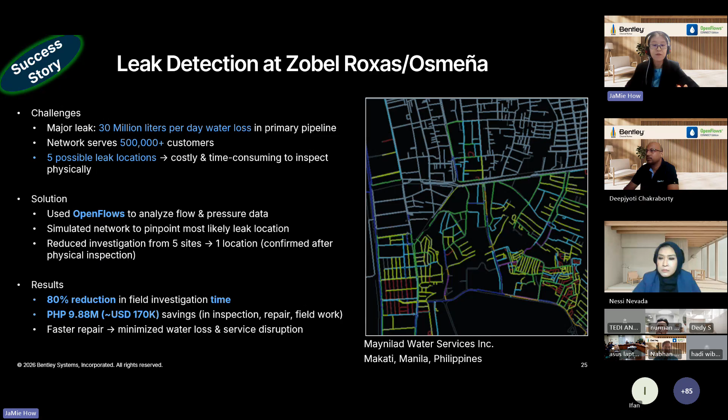So NRW reduction starts with knowing exactly where to act, and with the right modeling and field data, utilities or water bodies can target issues faster and more effectively. To achieve that, you will need the ability to analyze and understand the network in detail. This is where solutions like OpenFlows come in, and Bentley's OpenFlows solutions support modeling and analysis across water distribution and wastewater.

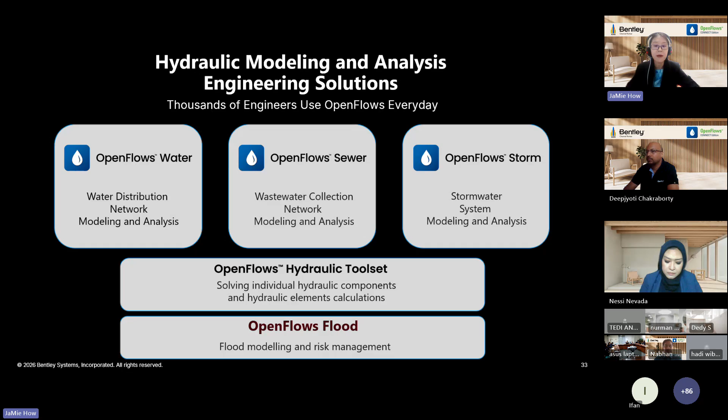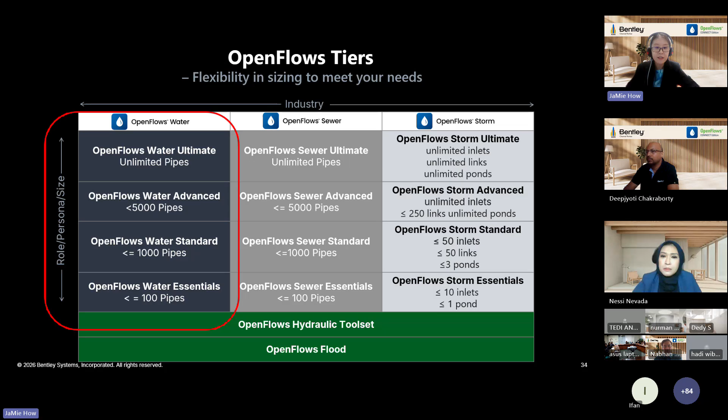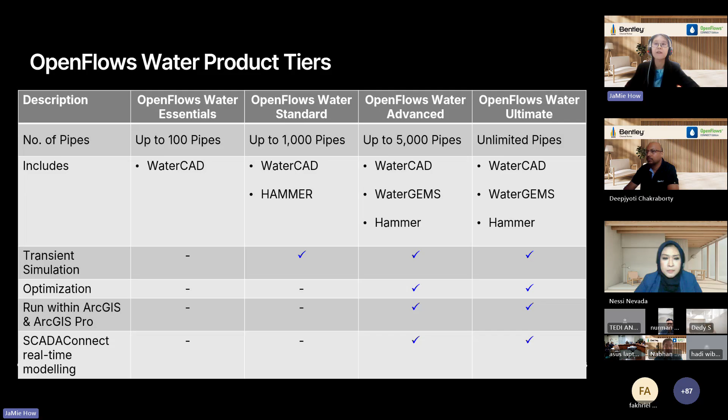Today's focus will be on OpenFlows Water. We will take a look at the breakdown or simplified comparison of OpenFlows Water. As mentioned, the differentiator is in terms of size, number of pipes, which is the size of your project - from very small projects of 100 pipes, 1,000 pipes, 5,000 pipes, to unlimited pipes for very large networks. You can use the larger ones, and the different tiers also cover different types of capabilities, from lowest to highest.

Lastly, we would like to share a little bit on the Virtuoso Practitioner License, which is available on Bentley's e-commerce platform, where you can purchase a license at an affordable price bundled with free trainings. So how does it work? It is a flexible solution because it can be purchased by any entity, whether you're an individual or from a small or large organization - you can purchase the Virtuoso subscription.

It is also flexible because it only lasts for 12 months. So if your project is for 2 to 3 years, you can use it for that period, and after that, if you do not need to use it anymore, you do not need to continue the renewal of your subscription.

And lastly, the free trainings that come bundled with the license you purchase - we call them keys, where you can use these to redeem free customizable training. For example, when you purchase a Virtuoso subscription of OpenFlows, it comes bundled with keys, and these keys will help unlock different types of training that you can redeem.

It can be on-demand, which is recorded trainings where you can watch at your own time and pace for a period of 90 days, or it can be customizable or specific to your project or team requirements. This can be done through tailor-made training programs or mentoring services for your specific project as well. All of this is done online through Teams.

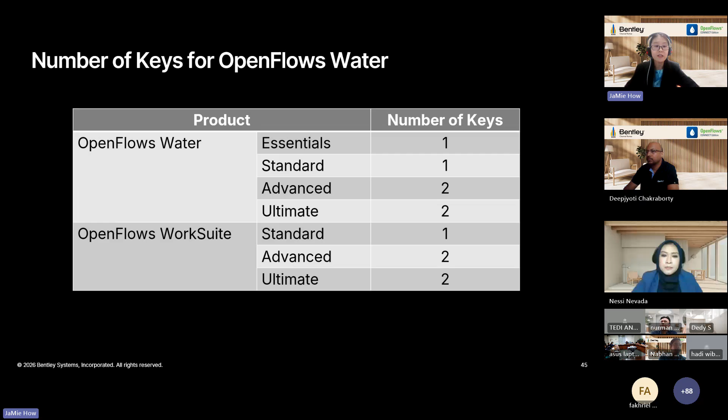The number of keys also varies depending on the product tier you purchase. For OpenFlows Water, the lowest two product tiers - Essentials and Standard - come with 1 key per license, and Advanced and Ultimate come with 2 keys per license. The WorkSuite is a combination of water and sewer, only if you have the requirement of both in your projects; otherwise, just the water solution will be sufficient. One key is almost 2 hours of free training that you can redeem.

In summary, the Virtuoso subscription is a practitioner license and named user license with yearly investment and without any additional maintenance fee. With this, you will have full control over your yearly software costs, and throughout your active subscription period you are eligible for free technical support assistance, free software updates for any new releases, and expert services redeemable using the keys bundled with your license.

If you need any further information, do contact Bu Nessi or PT Kurnia Handasa Nevada. They are one of our channel partners here in Indonesia, and we are happy to work together with them to assist you further on any inquiries you have.

So with that, we hope that this quick overview of how NRW challenges can be addressed through better visibility and data-driven approaches can help you. I'll now hand over the session back to Bu Nessi for her to introduce our next presenter.

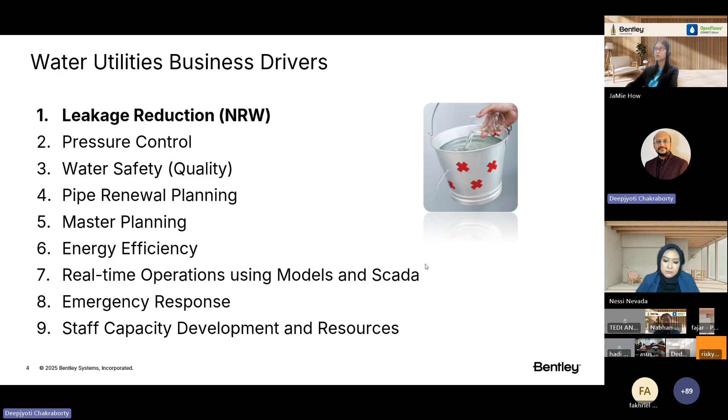The thing is how you are actually working with all of these tools. Sometimes we don't need all the tools, but we should know how it actually works. From master planning to everything, it helps with complete network optimization.

Now let's see a few points about the software. One is interoperability. Some of you who have joined are maybe experts in CAD, because in civil engineering we also learned CAD during our BTechs, and maybe in GIS too. We have complete interoperability with ArcGIS Pro, AutoCAD, and Civil 3D - on their platform, you can also use our applications. That is the interoperability.

So anyone who is an expert in water and also CAD or GIS can work on these solutions - no need to open this as a standalone application, you can avail all the features within MicroStation, ArcGIS Pro, AutoCAD, and so on. You may ask: if you have some GIS or CAD files, could they be opened in this application? My answer is yes - you can integrate all this CAD and GIS information here very quickly.

When you're doing any modeling, we usually don't go layout by layout manually. You can work according to Bing maps in the background, any CAD maps, shape files, or even images in the background. If you have a large network, you can integrate the road center line and create the model very quickly. You can simulate, predict, and solve network system problems, optimize, do 24/7 analysis, and even optimize pump performance.

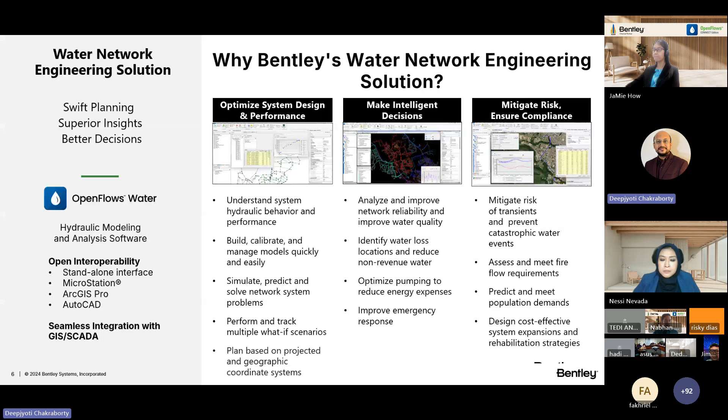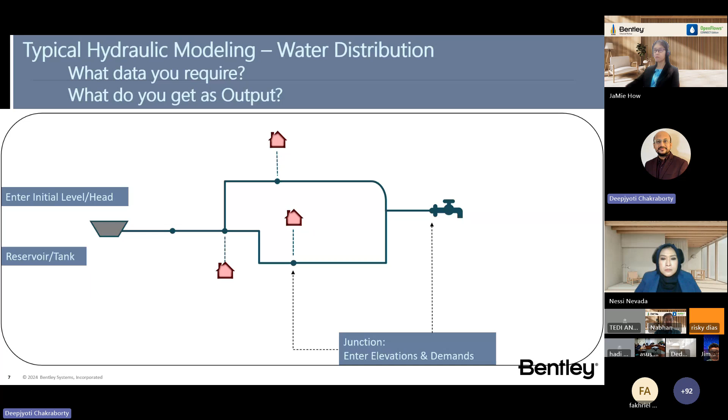Now let's have a look at a simple modeling example - what data you require and what you get as output. So you build the network, provide the reservoirs or tanks, provide the junctions, enter all the elevations of the junctions and the demands, and give the pipe lengths, C factors, and the diameters. Additionally, if you have pump curve input, give those inputs. After computations, you will get the output as pressure, velocity, hydraulic grade line, head losses.

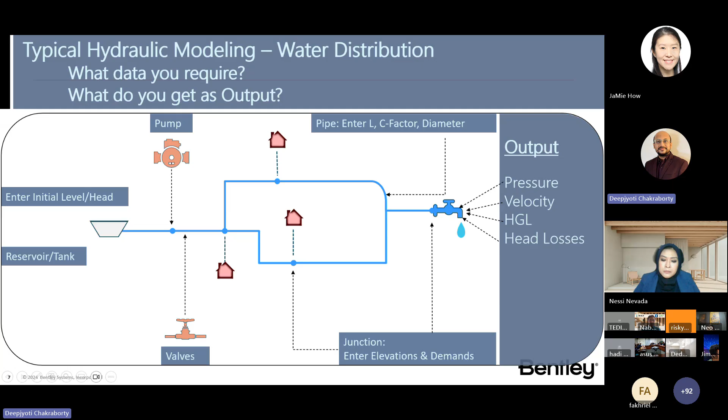And this is not limited to these results - there are a lot of results in graphs, in animations, in profiles also. You can compare those, make them in a tabular format, and there are multiple ways to showcase those results. But for a simple network, I'm just giving you the understanding of how it actually works and what data you require. Now let's see about the process.

So first, when we do the model building, we create the model geometry, we extract the elevations, we assign the demands. We have a lot of applications available in the market which are free applications, but they don't have the ability to integrate CAD shape files into your models very quickly. So those applications are not advanced.

You could not make that interoperable with CAD, GIS. You could not do the optimizations automatically. You could not just provide the diameter sets and have the software choose from the diameters - those things could not happen. You could not make multiple scenarios with multiple alternatives with those freeware applications.

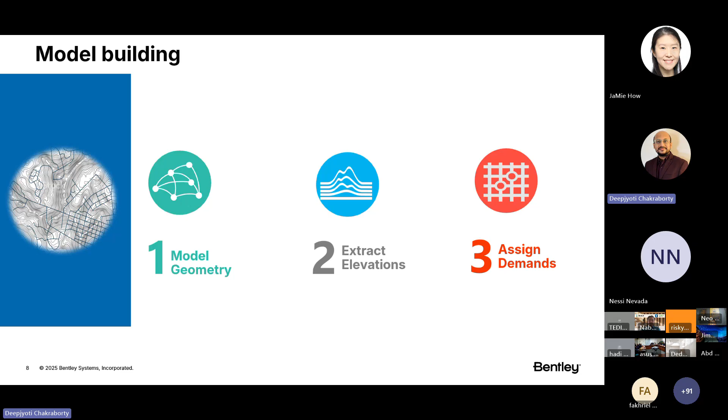And it has different demand assignment programs, I'll show you that. As an example, when you do this model geometry, the model could be built from any of the data sources - it could be CAD, SQL, Oracle, shape files, QGIS files. Even from Excel you can just import the data, and the model will be automatically built.

You need to just map the elements, like which junction is the point, which is a polyline as a pipeline - you just need to mention it. Even if you have much more attributed data, like pipe diameters, elevations, everything, you can just import through the model builder.

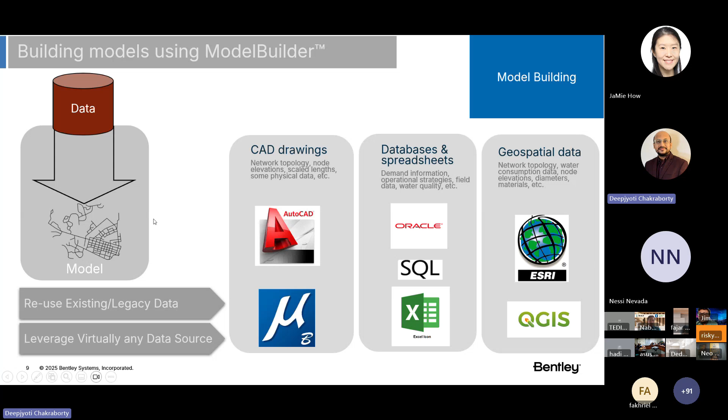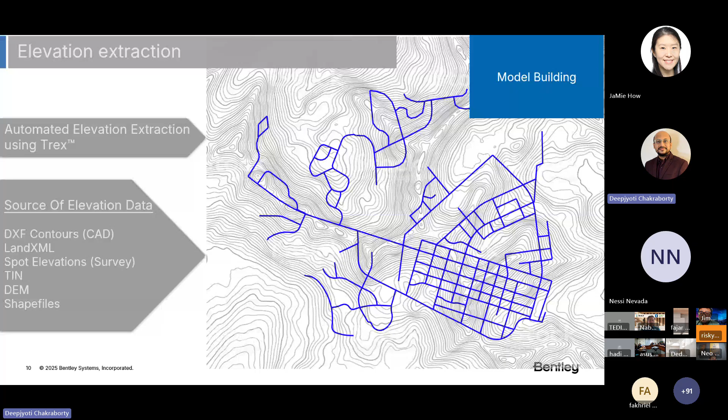So there is another way called TREX, the terrain extractor tool, by which you can make that contour map available in the background, and all the junction elevations will be imported from the data you have provided - it may be shape files, it may be anything. So you can easily integrate the data and make complete model files in a few seconds.

So next is the different methods of demand application. You can do manual methods - going to the junctions and providing the loadings - but that is a huge time-taking task. With the flex tables, though, you can do it rapidly. But this is more like automated methods.

Like you can do proportional distribution by area, equal flow distribution, proportional distribution by population. You just provide the densities and shape files, and the software will distribute the loading as per the requirements, according to the different methods you are taking.

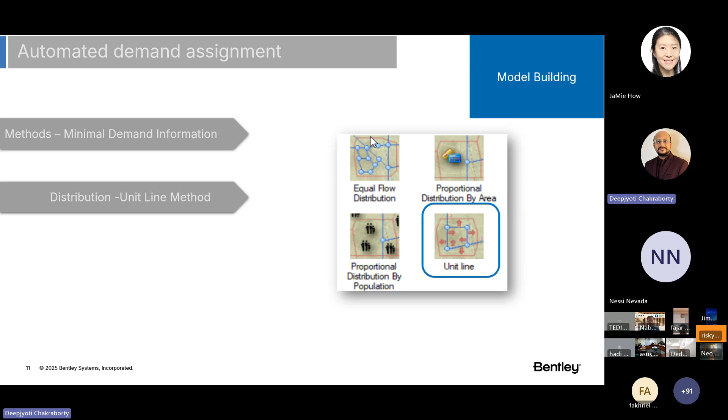There is another method called the unit line method - it will distribute the loads. For example, you want to distribute loadings for one village, so it will distribute according to the lengths of the network. So when you have less information, you can follow these methods.

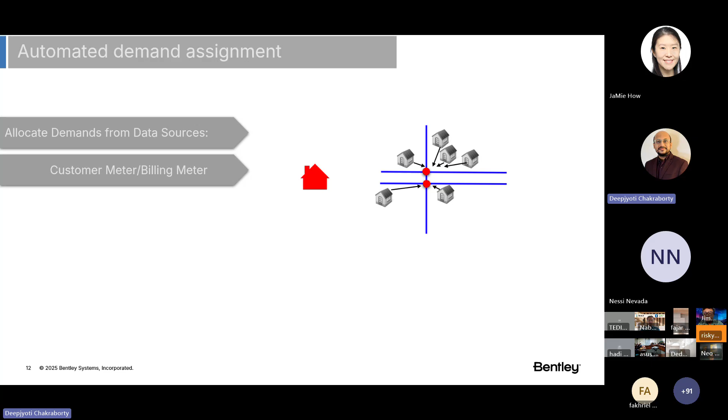You can calculate the Thiessen polygons and distribute according to the Thiessen polygon areas. You can go with the customer meters or the billing meter methods. You can go with flow area polygons, populations, or census polygons. You can also use land use polygons. So when it comes to the reports, there are multiple ways for those reports.

You can go with shape files, CAD files, land XML files. You can also export as EPANET files. Some of you may be users of EPANET - all the files you have in EPANET can be imported here, and you can make much more on it, those which are not available in EPANET.

You can make pump control sets, extended period simulations, pump schedules, and do optimizations - everything can be done here very quickly. You can showcase all this with good graphics - pressures, velocities, everything can be done with custom reports.

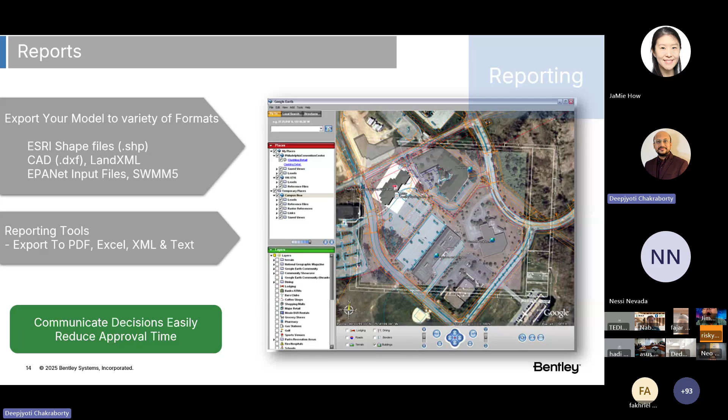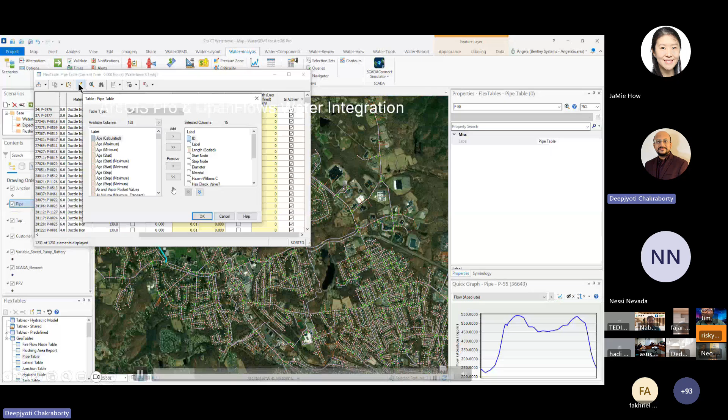In the left you can see those contents. In the background maps, this is flow graphs - you can create quick graphs from the pipe table. You can see the pipe tables, all things in tabular format - these are the tables available in standalone, but you can make this available in GIS or CAD too.

You can see the flows in the attribute table. If I open it, you will see the attributes for GIS and also the flows which came from the computations of these models. You can just initialize the symbologies and color code, and make the annotations too.

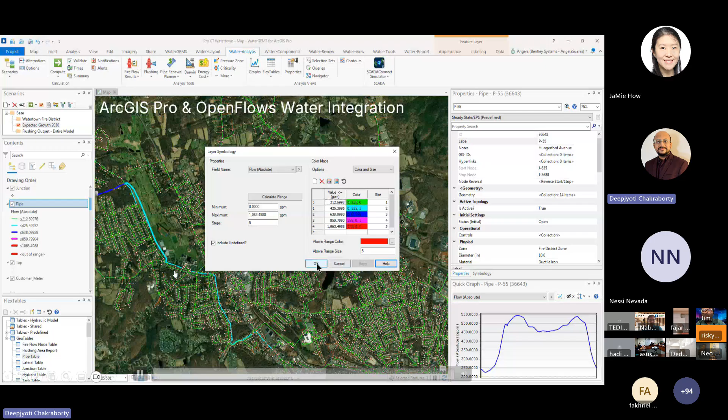So I'm doing a flow range and will color code the network according to the flow. You'll see the colors changing across the network - these are the different colors of the flows. You can do this same thing for junctions too. So this is GIS integration.

Similarly, you can do CAD integrations, and you can do all the features, all the possible ways of using OpenFlows Water tools, on those platforms too.

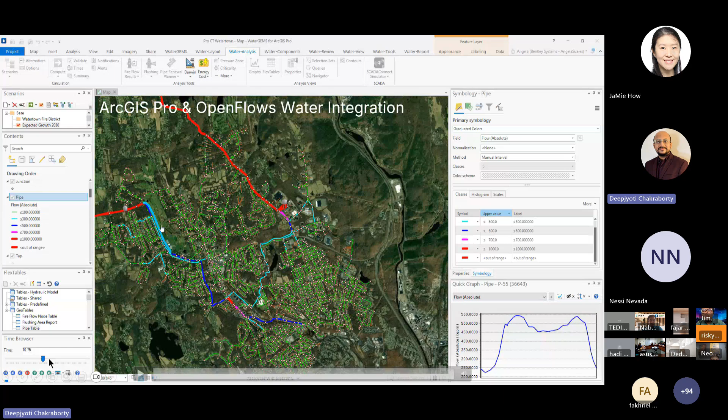Now let me show you the time browser. When you do extended period simulations, you will see the color of the network change, because we are running that EPS. The same thing we can do in standalone, you can do in GIS or CAD platforms too.

Let me show you the water supply network workflow. First we do the topographical survey, population forecast, demand estimations, then zoning, then modeling and analysis and designs, and finally report preparations. From zoning to report preparations, all the steps could be done with OpenFlows applications.

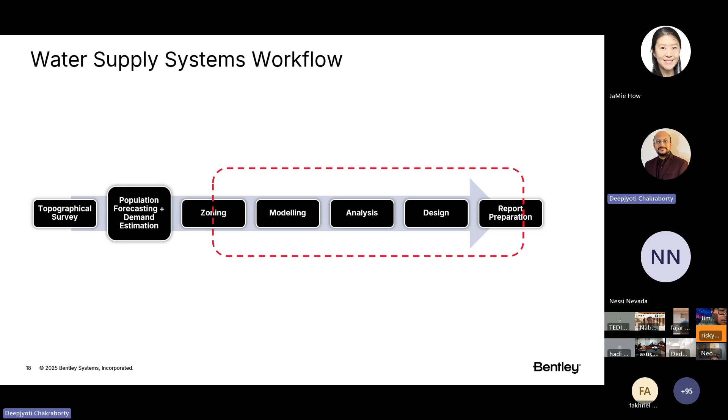Now let me show you one of the key strategies for the 24/7 analysis, so it will be much more clear how we actually do the 24/7 analysis.

We divide the project based on the WTPs and do surveys for zoning and pressure zones. We make the pressure zones - you must create the DMAs, and the pressure zones will not be the same as the DMAs. I'll come to these things later.

We do the population forecast, estimate the demands, and design the head works and WTPs, the transmission mains.

Now you can also avail the transient analysis in OpenFlows Water applications too. Previously, you had to purchase OpenFlows Hammer software as a separate entity, but from last year, we made this available with OpenFlows Water too. So if you want to make transient analysis for your rising mains, you can do it in OpenFlows solutions too.

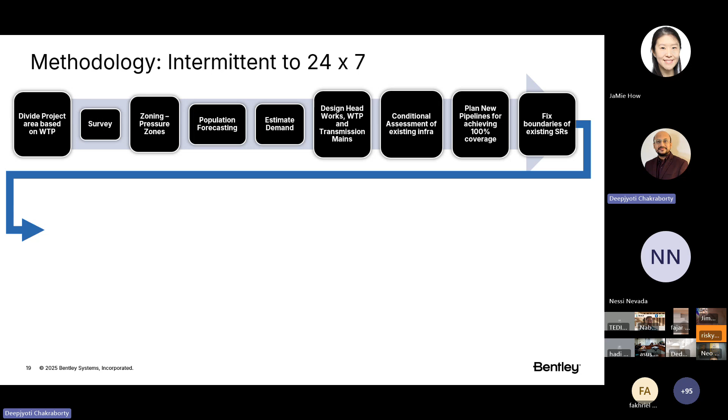So we do the condition assessment of existing infrastructure, and we plan the new pipelines. You can go with the rehabilitation studies - what is new, what is the analysis with the existing structures.

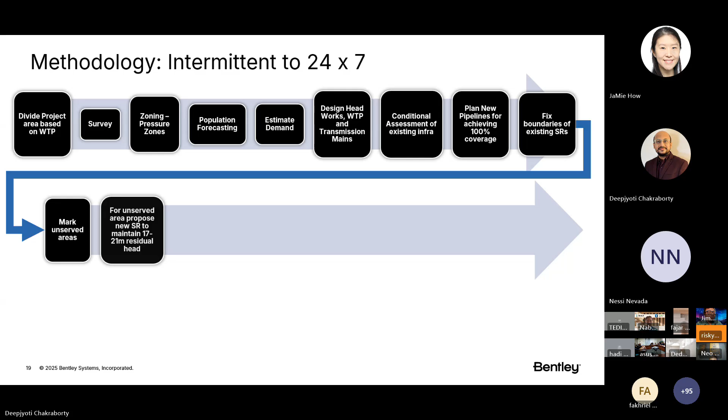So the method here is that we first mark the unserved areas and propose a new service reservoir for this, to maintain some pressure that is recommended in your guidelines. And we do the hydraulic design for all operation zones and DMAs to discard the old pipes.

So you can go with VFD pumps where you can just set variable curves according to the curves so that the pump will work. And you can design exclusive feeder mains for each DMA for the outlets for the ESRs.

Each DMA will be isolated by isolation valves, bulk meters, FCVs, or any other valves. So all those valves you can create here, and you can go with DMA-wise measurements for the NRWs. You can monitor the water entering the DMAs and measure the consumption by 100% metering, making that metering system there.

And slowly all DMAs will be converted to 24/7 pressurized systems. You can regulate the pressures in the DMAs using VFDs, and additionally, you can go with SCADA or digital twins.

You can integrate the SCADAs with real-time analysis and see all of that in real time - the pressure drops, the changes in velocities, everything in HMIs. And in a much more advanced way, you can do integrations with WaterSight, where you can make all these things available on cloud-based platforms.

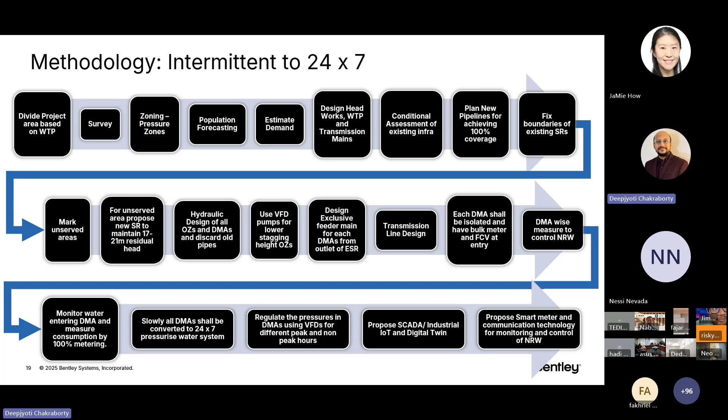So with smart metering like this, you can make NRW strategies. This is the complete workflow for you, what we follow in OpenFlows Water, from the starting of the models to the DMA metering to leakage detection.

We do the calibrations with the Darwin Calibrator. You can do the criticality study, pipe renewal planner, and also SCADA simulations.

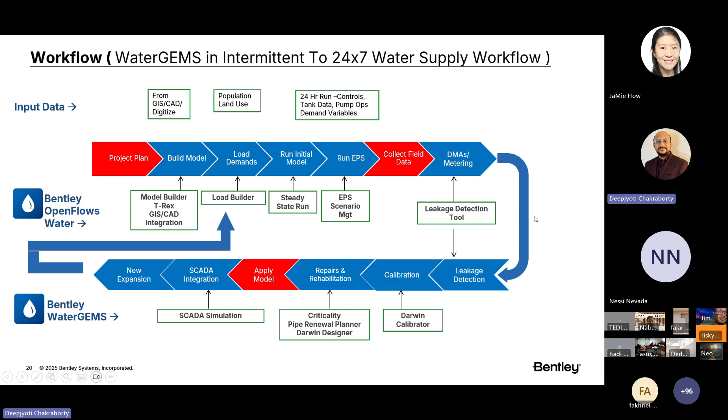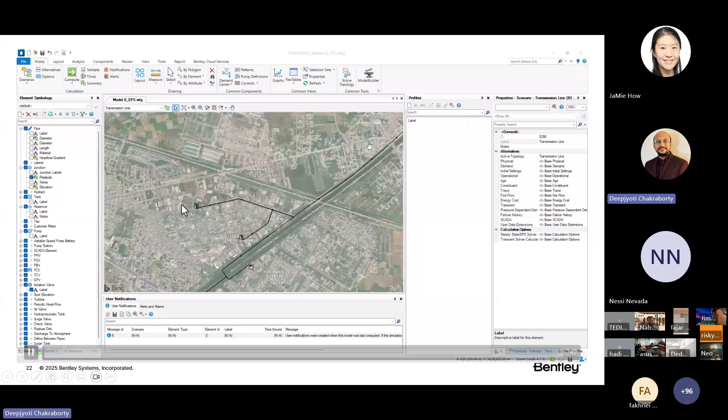Now here is one example of a network. So here in that reservoir, it's coming into a network you can see. In the background, this is a base map. This is a rising main, with 4 tanks, and this is the distribution network. So I have run 2 scenarios.

This is showing different scenarios, something like that you can create. I have run with the pump patterns, and just by changing the time browser, you will get to see how the pressure is changing, because I have changed that with the color codes.

Similarly, you can just set these patterns for the EPS, extended period simulation, and assign this to the loading, so that the load will change, and obviously the demand changes, and also the pressure will change with this, along with the pipe diameter.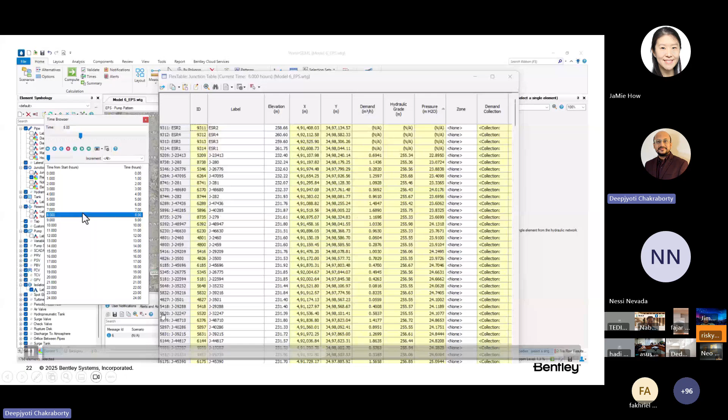So this is how you can get to see it in tabular format. The pressure is changing with time. You will get to see the hydraulic grade, everything.

Additionally, you can go with the tanks and the graphs. You can compare the pump graphs, tank graphs. You can set the controls.

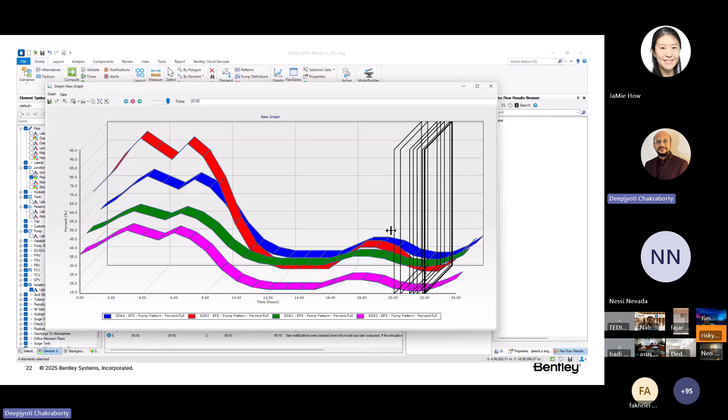Even when you set the controls, you can make the pumps turn on and off according to the time, according to the level of the tanks. So this is how, with time, that tank level is changing.

Similarly, you can do the pump setups. So here we have the pump and pump controls. In a much more advanced way, you can go with fire flow analysis, energy cost analysis, Darwin Designer for optimizing in an automated way.

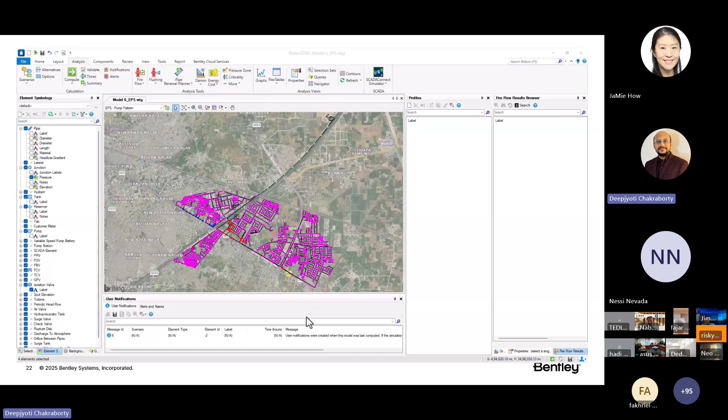So as for the NRWs, we know that there are 4 steps in the digital workflow to manage water losses and to improve the network reliability using OpenFlows Water.

That's how we first identify the water loss location using Darwin Calibrator. You then prioritize pipe repairs using criticality analysis. You then optimize the network pressures to minimize leakage. Then you prevent with transient analysis.

So overall, the workflow helps utilities detect the leaks, prioritize the repairs, reduce NRWs, and improve system reliability.

So the thing is, how critical is NRW? Many cities have NRW levels of 30 to 50%. So in reduction strategies, there are multiple ways, not only the DMA.

DMA will divide your network into smaller zones and ensure limited inflow points, flow metering at the entry, and help you in zone-wise NRW calculations.

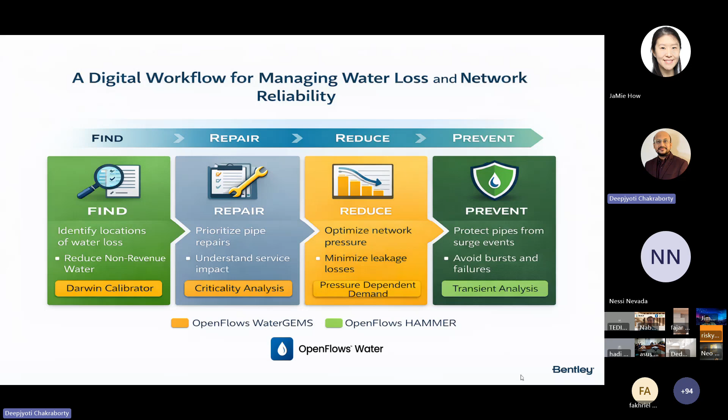But there are also ways you can do it with a calibrated hydraulic model. You just import the networks, load the demand data, go with the SCADA or field data. I will show you - the calibration ensures the model reflects actual ground conditions.

So you can compare the leakage. You can go with pressure dependent demands, PDD, that is one of the game changers. You know that where there is higher pressure, there will be higher leakage - realistic behavior. So according to that, you can do that.

For pressure management, the most effective ways are to use PRVs, PSVs, and FCVs, and identify the high pressure zones. You can reduce the pressures to optimal levels.

You can go with night flow analysis, simulate low demand periods, like 2 to 4:30 a.m., and by looking at those flows, you can pinpoint hidden leakages.

Another method is scenario comparison using DMAs. What is a DMA actually? It's a hydraulically isolated zone that helps measure inflows, monitor consumption, and quantify leakage and NRW. In OpenFlows Water, you do this with isolation valves, closed valves, and metering nodes.

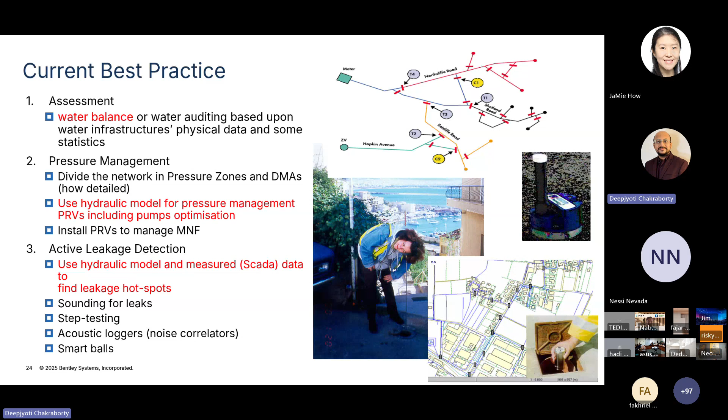Let me show you the different ways this can be done in OpenFlows Water. This is how, with Bentley's OpenFlows Water, you can do it. So you may ask, can I do all these strategies? My answer is yes.

You can understand water losses through water balance, directly see the different pressure zones, and what the hydraulic grades and pressures are. You can do DMAs and PRVs.

You can use leakage detection strategies with field measurements, and use the pipe renewal planner to calculate risk of pipe bursts.

When we do criticality analysis, we identify which pipes are most vital or which areas should be shut down for efficient leak repairs. Similarly, you can use pipe renewal planners.

For pressure management, the key concept is maintaining optimal pressure levels in the distribution system, since excessive pressure increases leakage rates and pipe bursts.

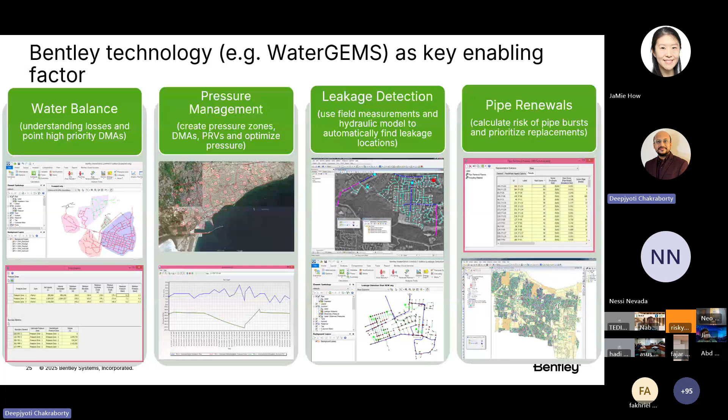The process is to analyze pressure distributions across the network, identify high pressure zones or critical nodes, and simulate the PRVs. All this integrated approach is available in OpenFlows applications, from DMAs to pressure zone managers.

Here is one of the DMA tools, where you can see the DMA-wise number of pipes, boundary conditions, and color code them according to pressures. You can also define different zones here.

Pressure zones divide the network into areas with similar hydraulic pressures, typically bounded by closed or control valves, whereas DMAs are smaller. You can create both in the same file - that's the beauty of this application.

You can run the pressure zone manager to identify which elements belong to each pressure zone and simplify model management, while in DMAs you can improve the NRW calculations.

By creating DMAs, you prepare and validate the hydraulic model and define DMA boundaries using these tools, then add the flow meter at the inlet, which will directly show you the DMA-wise flows and everything.

The tool uses clustering algorithms that group highly connected nodes together while minimizing connections to the rest of the network. By automating DMA creation, engineers can quickly evaluate network segmentation, analyze flow balance, and identify optimal locations for meters and isolations.

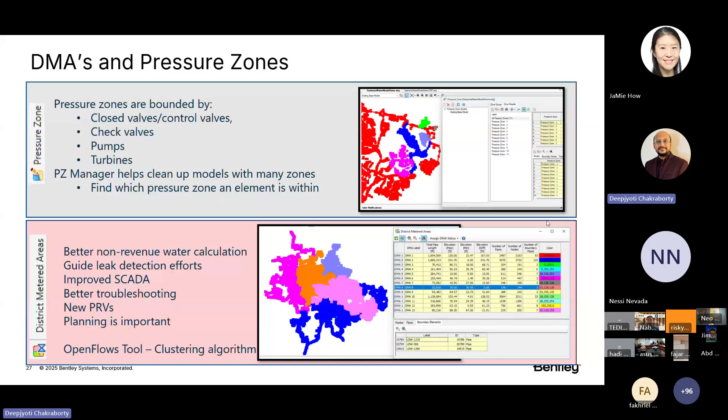You can also merge adjacent DMAs, highlight zones, and refine boundaries. It's not like you have to fix the boundaries permanently.

I have already talked about the Darwin calibrators and leak detection. This reduces the time required for manual calibration and ensures the hydraulic model accurately represents real world system behavior. I will show you step-by-step guidance on how to compare field data with model results and perform leakage detection.

So when observed flow is consistently higher than the model demand, the system may indicate possible leakage locations. You can go with the optimized automated ways with the Darwin Calibrator algorithms, where you can adjust parameters like pipe roughness and demand, and see the observed difference between observed flow and the leakage. So here is one of that.

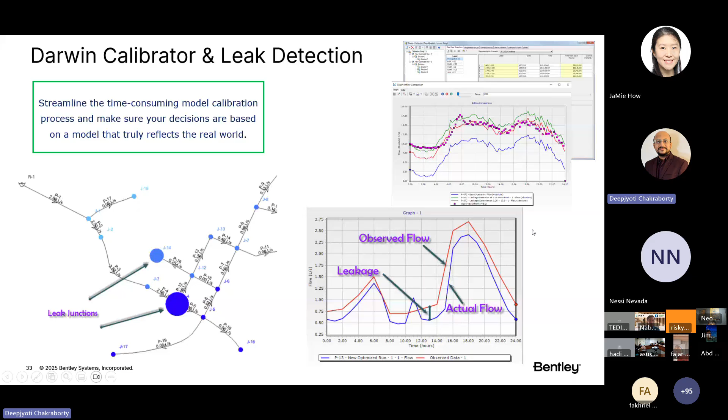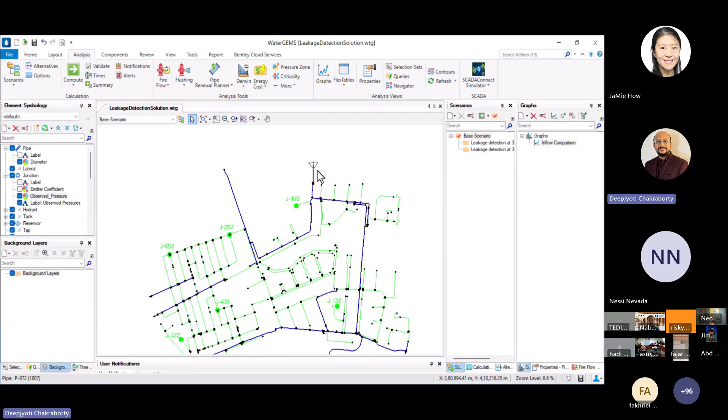Let me show you. I have got the 6 points of the 6 junctions for observed pressures. So I will run Darwin Calibrator with the field data. For the field data's input, this is like the model data. I have run with the model, and now I want to go with the observed data and make the input from that field data.

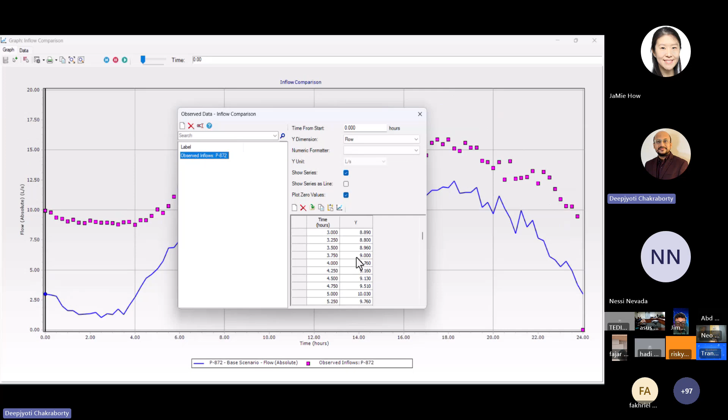So I have just given input. These dots are representing what I got from the real data. If I compare that, I need to create another scenario, another curve. So with that, I have created these field datas, different for 15 minutes each of that field data.

As an example, I want to create the leakage detection at 3 a.m., 3:25 a.m., so that is like 3:15 a.m. So here I am just creating the demand groups, and making it available just to show you one thing.

How this will detect: I will detect according to the maximum trials, and this is the minimum emitter coefficient and maximum emitter coefficient. You can also change it, make it like 0.8 or 1.

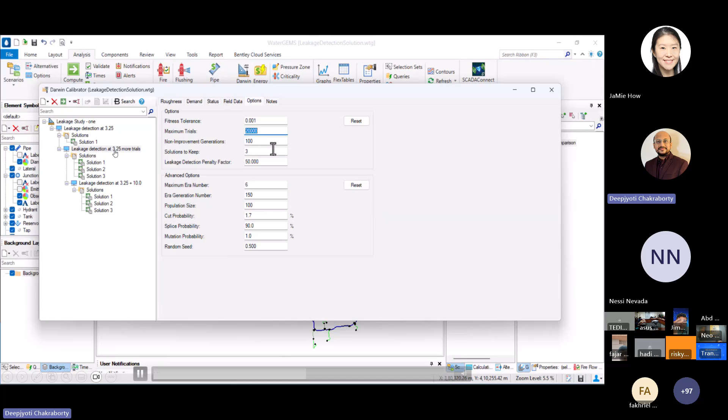Additionally, this is the maximum trials, and you can see the number of leakage nodes I have detected, which is 6. If I sort it, it will show you the adjusted emitter coefficients. So in these 6 junctions, I have changed the emitter coefficients, and I will create new flows on that and compare the leakage.

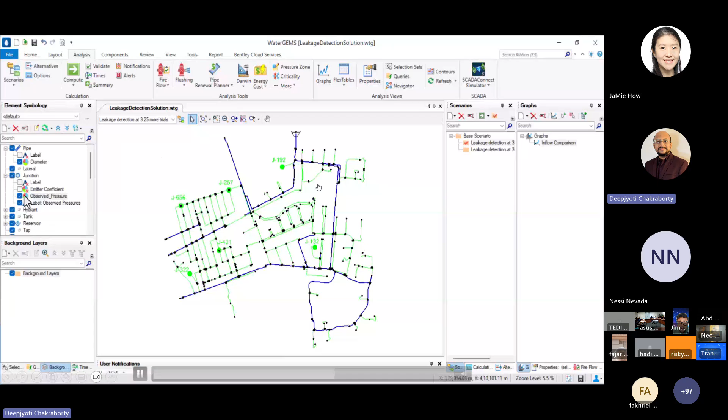If I compute that, it will make different solutions with the different original and emitter coefficients calculated. Then you can create the observed pressure versus actual flow, observed flow versus actual flows, and compare those.

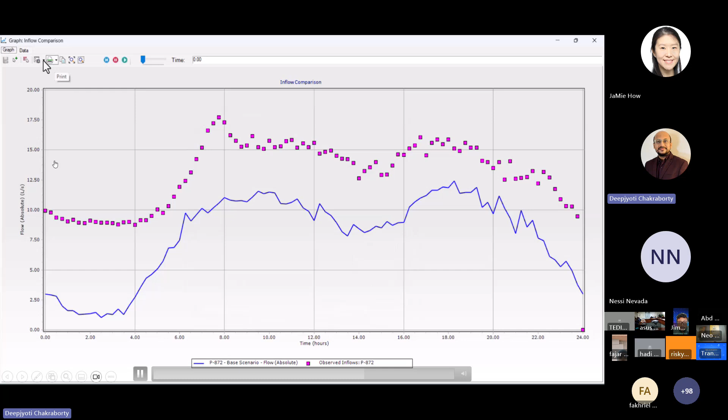So I'm showing you this is from the field, and I have created new flows from the observed data. If I make this available, this is quite similar. You can see this with the dots, and you can compare those, and with this comparison, you get to see the values of hydraulic grades.

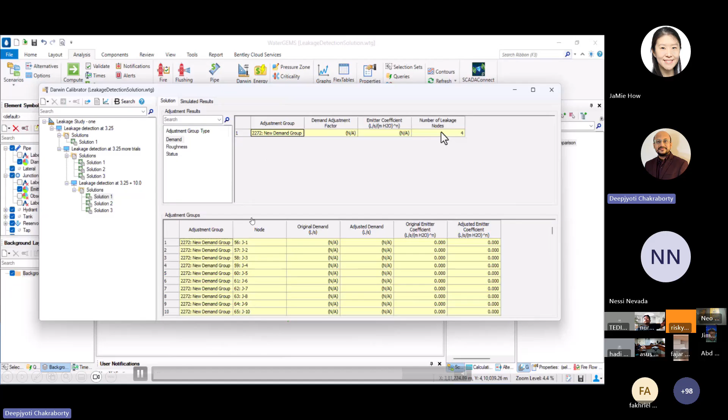Similarly, you can create leakage detections for more times, and you will get to see which junctions are active, where you are getting leakage. So at the time of 3:25 plus 10 hours, you'll get to see 4 junctions where there may be leakages.

So the Darwin Calibrator is another tool which reduces the time required for manual calibrations, and can help you compare. So now you can also create more calibrations and do them very quickly.

Let me show you this with the SCADA system integration. This is where OpenFlows WaterGEMS comes in, to close the gaps of information between sensor reporting to the SCADA data.

Realistically, you don't have a pressure sensor installed at every corner or every street, but you do have a hydraulic model, and you can use that to determine where the high or low pressure actually exists in the system, or for future projects. You can do this with historical data, or with live sensor data. So if we supply the hydraulic models with live data, you can see when and where there may be a problem before it occurs.

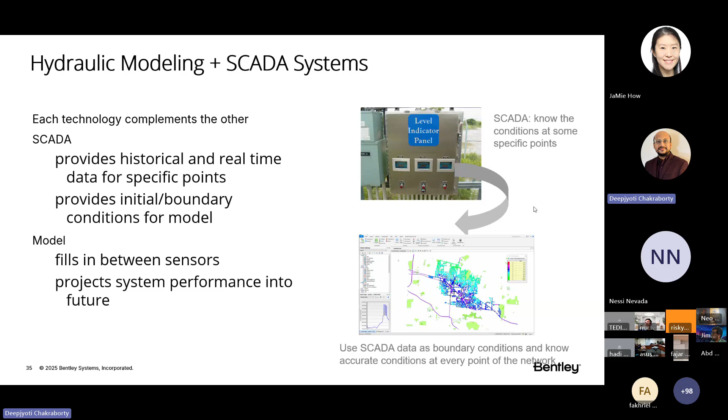With this advancement, you can go with pipe burst scenarios. Not only pipe burst, you can do fire event simulations, and export the results to SCADA. There are different events like pipe shutdown, power outage — multiple events you can create and run.

As an example, here I am making an isolation valve, and I want to check which area will be affected. I can make it and see over time how the customer impact will be identified, and the risk.

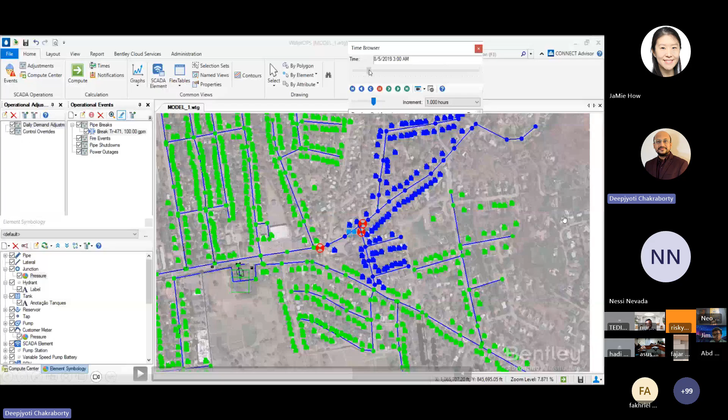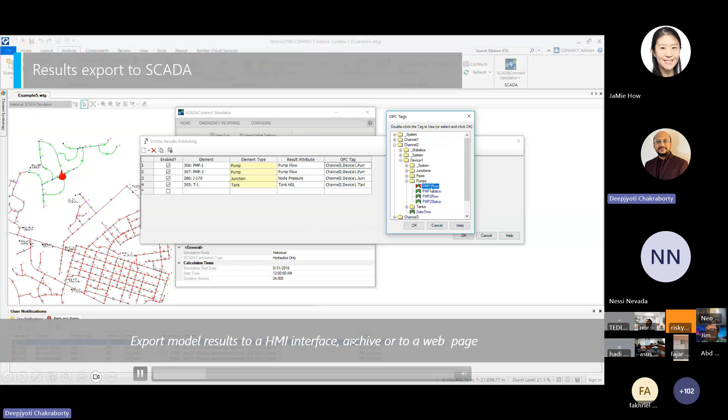Similarly, you can export the results into the machine interface I mentioned previously, and you can see all of that with these HMIs - how the pressures and everything changes. So this is what you can do with SCADAConnect simulators.

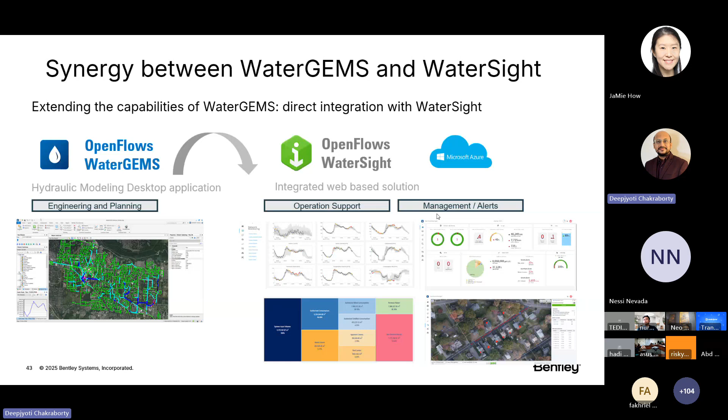With the new update, we have digital twin integrations. Now we extend the capabilities of OpenFlows WaterGEMS by directly integrating it into WaterSight, where you'll see the NRWs and everything - not only NRWs but all the management and alerts, the pressures, in cloud-based dashboards. OpenFlows WaterGEMS can be integrated with WaterSight, where you get all the anomalies and zone-wise flows.

Here's a quick look at how this customizing and flexible reporting works. You can create zone-wise NRWs and also average daily NRWs. You can also predict overall figures for the months and for the years. Let me show you a few case studies too.

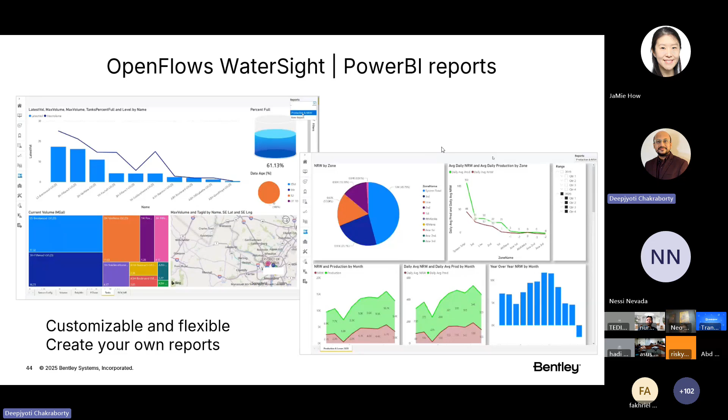This is one of the case studies with Manila Water. The Manila Water Company leveraged OpenFlows Water to address critical issues in their central distribution network, benefiting 3 million households. They used it to optimize pipeline replacement, install pressure reducing valves, and reconfigure the networks. OpenFlows Water's seamless integration with GIS data saved time and cost, and helped them reduce the NRWs by more than 50%.

There's another case - Singapore's national water agency. They created a case study I'd like to showcase. If you don't know much about Singapore, the country has a small footprint but big environmental challenges. Singapore PUB previously built a smart grid using IoT sensors, but operations were still finding it difficult to find and localize pipe leaks and underground bursts that contribute to NRWs and wasted environmental resources. So Bentley developed an AI-powered solution.

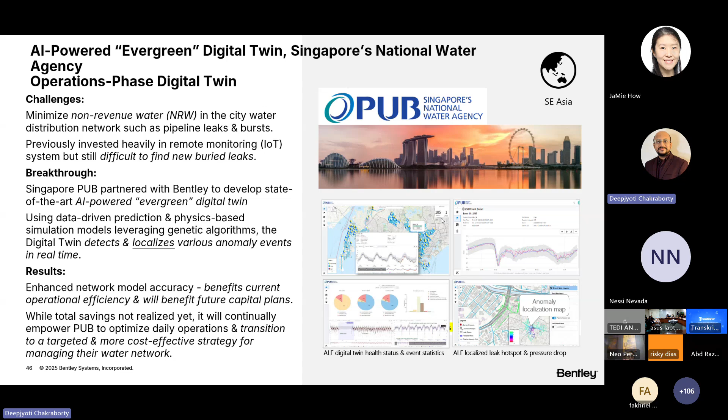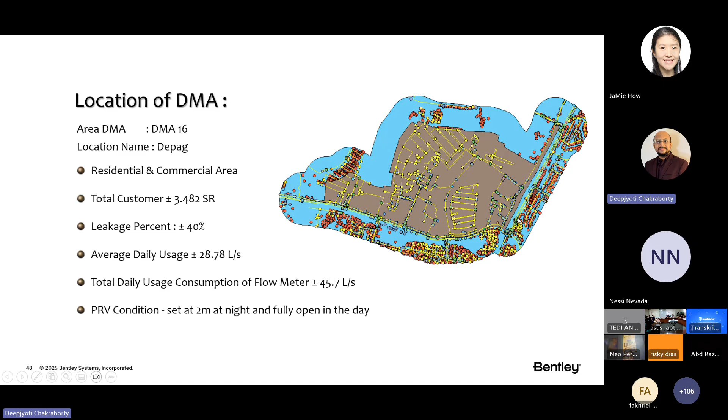They ran night flows with PRV conditions, and with those night flows they checked which areas were getting leakage. Using field loggers and customer meters with OpenFlows Water, they logged the flows at different times like 2 a.m., 3 a.m., and ran calibrations to determine where the flows were occurring.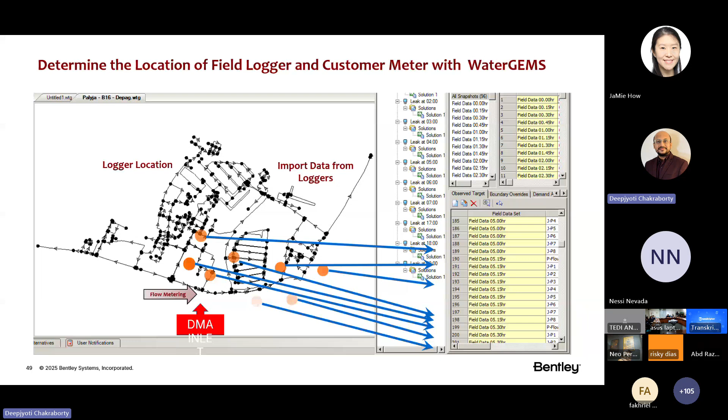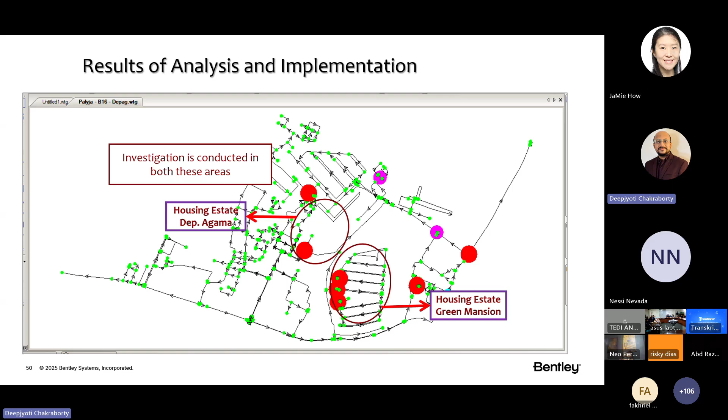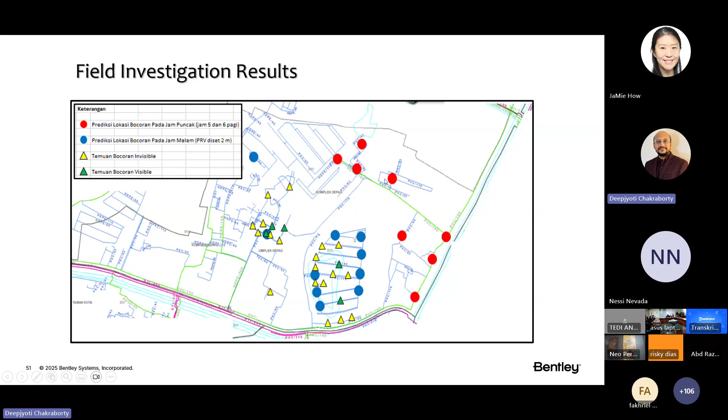This shows the different DMAs and where they placed the flow meterings and logger locations. At different locations they created logs, and all the logger information was recorded. From that they could roll out the flow meterings. They analyzed reports from their investigations across all the housing estate areas and different pressure zones, compared those with different scenarios and field investigation reports, and from that determined what the leakage would be.

I can show a lot more case studies, but you can also check them on our website. If you have any questions, please feel free to ask me.

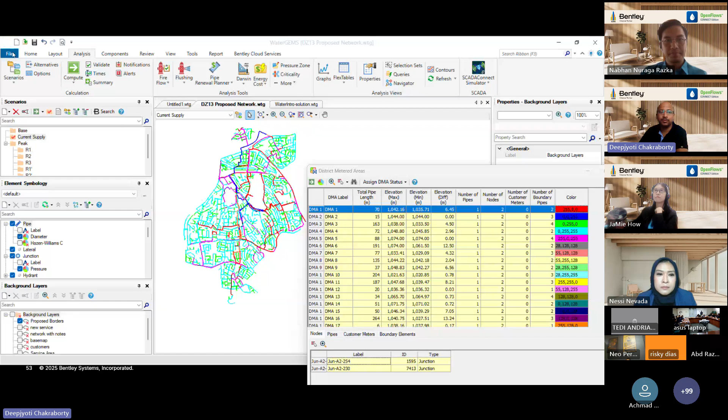Maybe this question is from me to new users of OpenFlows WaterGEMS: is there space for us to learn about this, like sample models, similar to how other software offers quick lessons? Yes, the software already has quick lessons built in, plus we have YouTube channels. If you go into the software, it will directly show you hands-on trainings with step-by-step guidance, and you can also get formal training. In the files section, we already have all the required links, so you can go with 'Quick Start Lessons' to get the models and everything.

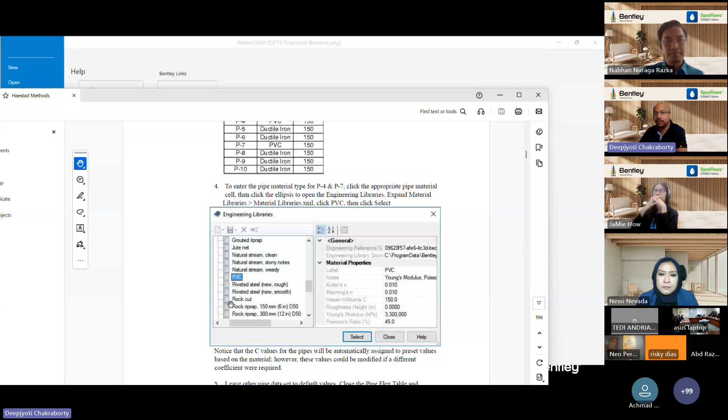This has step-by-step guidance for everything, so it's very easy. Whether or not you're working in water supply network engineering, it has step-by-step guidance. Anyone working with EPANET will already know the basics, so it will be much faster to learn, though it has much more advanced tools you'll still need to learn.